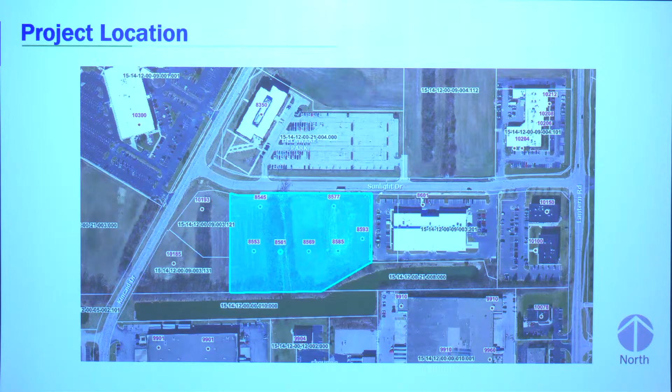The surrounding properties are also located in Delaware Park. The surrounding character is shown here with an office building to the west and to the north, and Paige's Music to the east.

The site plan shown here shows the proposed buildings and landscape. The project contains 12 car condominium buildings and the associated infrastructure, proposing 71 individual condo units in total.

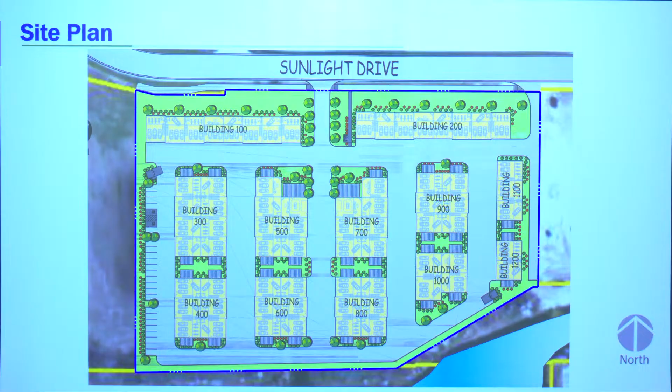The petitioner worked with staff by adding modulation to all buildings, updating materials, and reducing building massing by breaking up the internal buildings and adding green space with patios. They also worked to create an appealing landscape area added to the entrance point, making it the visible point off of Sunlight Drive, with more landscaping and patio area heading south.

Per the Delaware Park PUD architectural design standards, all mechanical units shall be located and screened to minimize visualization, which the petitioner has stated will be done with rooftop units screened by a parapet wall. The PUD design standards allow for materials including composite wood, steel, aluminum, metal, precast stone, precast concrete, porcelain ceramic tile, masonry, glass, and EIFS.

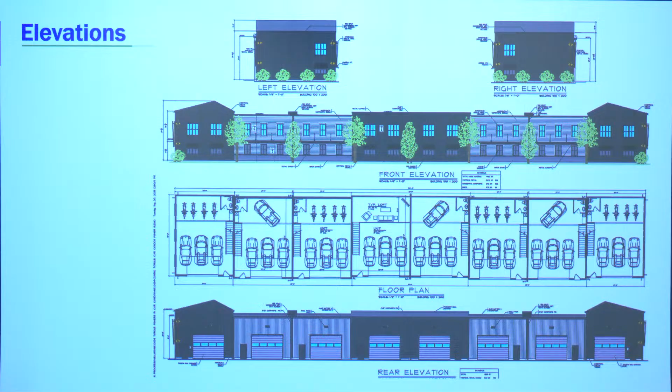These elevations are the elevations of the buildings fronting Sunlight Drive. These buildings will include vertical metal siding in 2 different colors, dark and light, horizontal composite siding, brick wainscoting, metal canopies and sunshades, and custom metal decorative brackets that are 12 feet tall.

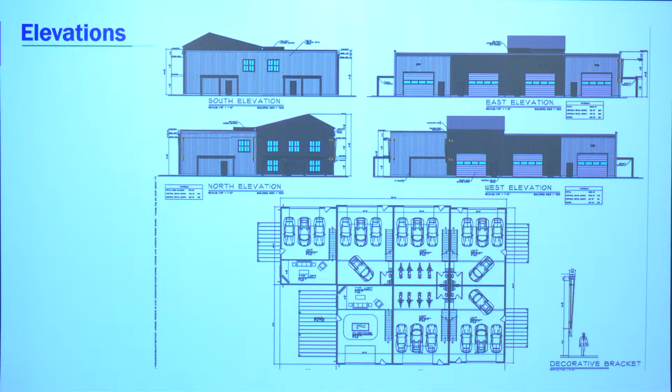These are the elevations of the internal buildings. The internal buildings consist of vertical metal siding in 2 different colors, metal pergolas, and custom metal decorative brackets. Here's another view of one of the other internal buildings.

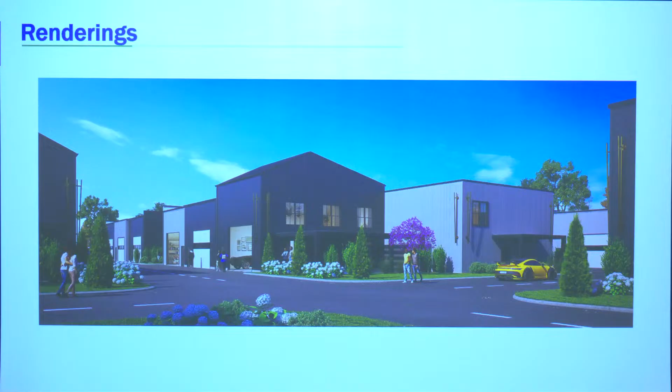These renderings show the building along Sunlight Drive to the left and a view of the internal buildings at the entrance point. Here's another image of the internal buildings from the entrance point, and these are some of the internal buildings and their patios.

Staff recommends approval of the proposed elevations as presented with the following condition: that all TAC comments are addressed during the ILP process. Staff is available for questions, and the petitioner is here to give a brief presentation as well.

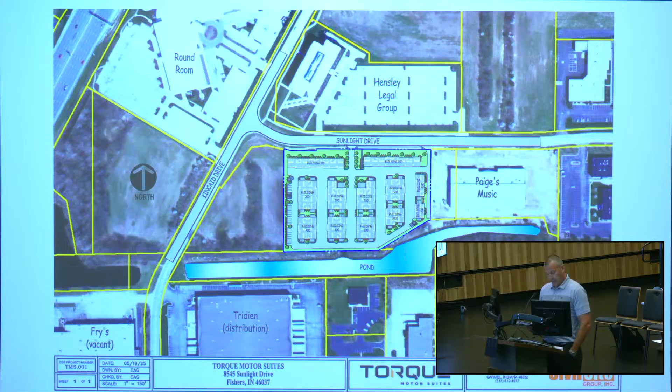The Torque Motor Suites project is located within Area C of the Delaware Park PUD, which permits C3 commercial and I1 industrial uses. All of the drainage and utility infrastructure within the Delaware Park development is master planned for both the existing and future development. So everything's right there for us, stormwater detention, utilities, everything's already in place.

The project was submitted back in November. We went to TAC and received relatively minor comments regarding the infrastructure. Since then, we've been working with staff to tweak the architecture, the site plan, and so on and so forth.

5 of the longer buildings were split up into smaller buildings with additional amenities, and building offsets were added as well. We originally had 7 buildings; that's now 12 buildings, with a reduction in the overall square footage as well.

Most of the end cap units here will have patios and pergolas, and there will be some common area clubhouse within some of these buildings as a common area amenity for the unit owners.

With that, I'd like to introduce Matt Blankenship with Nair Properties. They're the developer on this project. Matt's going to talk a little bit about the character of this project because I know it's a little bit unique and there may be some questions.

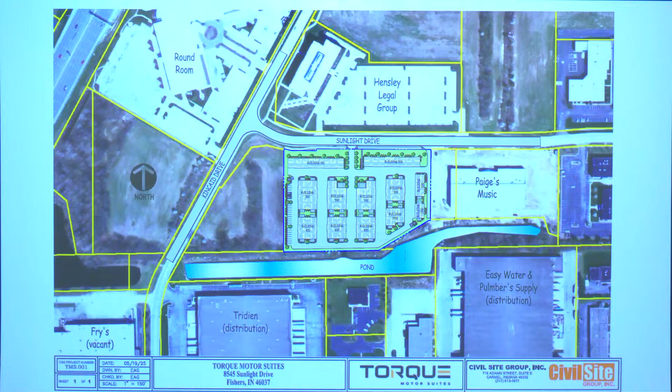Thank you, Eric. My name is Matt Blankenship with Nair Properties. We are the developer here of the Torque Motor Suites. First, I'd like to thank the staff and the board here for working with us as we've gone through the design. We are really excited by this.

So the concept of this is really for car enthusiasts, for those that have real interest to have a piece of property where they can own, customize, store vehicles, and really have a sense of community with other car enthusiasts. It's a demand that we've seen a lot in these different communities. This is the 4th one we currently have under development of these Torque developments in the Midwest and South, with more future to come.

So that was just a brief overview. Like I said, if you have any questions, let me know.

Thanks, Mr. Blankenship. Any questions for the petitioner from the board? Comments?

I definitely appreciate the work you all have done with us and staff over the last few months. Sitting here looking at those adjacent properties, the Kiddie Academy that was just approved, I still think there's a big miss on what it looks like, and on having all metal materials here. I know at one point we had recommended having more brick and masonry on the buildings. I'm really struggling with what specific feedback to give back that makes it not look like all metal panels. I look to the rest of our committee and members to share their feedback, but I'm still struggling with this project.

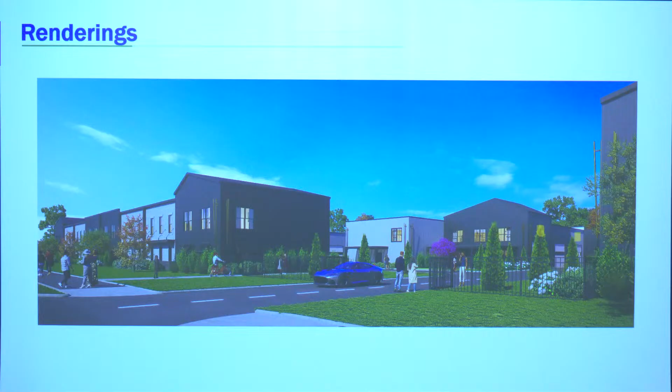If they're allowed to work on them, that means there's going to be oil and grease and whatever else. Do we have any of that being looked after in terms of the systems going into doing that? When we put restaurants in, there's a grease trap put in. When we design public works garages, which are again a pre-existing metal building, we've got to put in oil separating units and all that stuff. Is that part of this project if they're car enthusiasts? So I've got issues on a number of levels with this thing, and in its current condition I'm not supportive whatsoever. Thanks, Pete.

Sean, any comments yourself? And then I want to give the staff an opportunity to address the questions Pete raised. I'd echo both Megan and Pete's comments, specific to the architecture in general relative to the other buildings in the development.

I don't think all the buildings have to look the same, because we're pretty particular in that we don't require buildings to all look the same. I think that's something we've been consistent about. But it does feel like it's the outlier compared to what has been developed.

I can kind of understand the idea behind the pergolas, because it isn't just storage. The idea is that it's the man cave that's not in your house. So it's the guy that's got 2 or 3, $100,000 cars and has a place to store them, not at his house, and he's hanging out there with his buddies, smoking a cigar and drinking a bourbon.

But I also agree, is there anything preventing someone from working on a car there? And does that throw it into a different zoning classification of automotive maintenance versus automotive storage? So that would be my concerns as well. Thanks, Sean. Any comments, Drew, on your end? Okay, Ross. Go ahead, Megan.

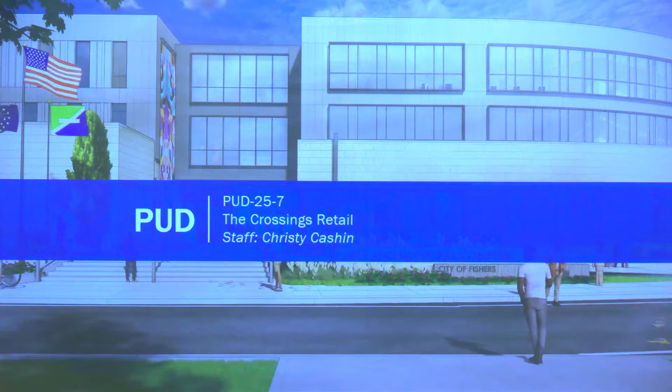Thank you. Our next agenda item is the Crossings Retail, case number PUD-25-7. It's a request to approve the site plan and architecture for 2 multi-tenant retail restaurant buildings located at 9086 Maynard Lane. Christy is here once again for the staff to present. Good evening again, Christy Cashin, Senior Planner with the city's planning department. The project before you tonight are 2 multi-tenant retail restaurant buildings located at 9086 Maynard Lane.

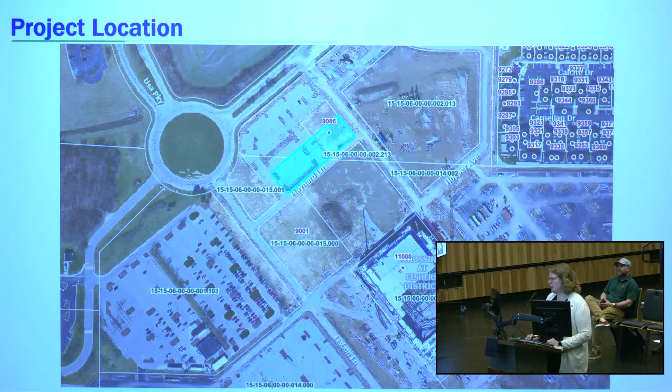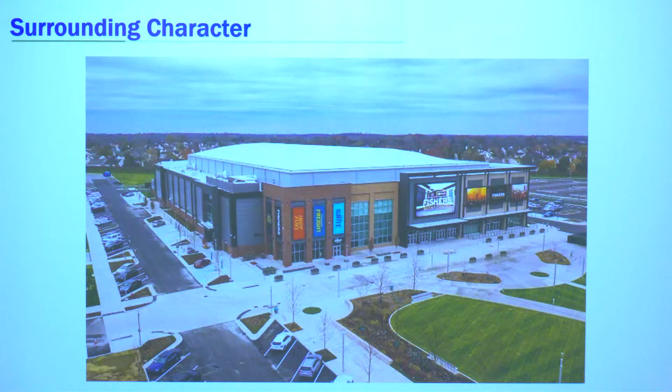The property is generally located on the eastern quadrant of the USA Parkway and USA Drive roundabout. The property is located in the Yard Phase 2 PUD, ordinance number 091922F. The Fishers Event Center shown here is the surrounding character for this area. The event center is also located in the Yard Phase 2 PUD.

This project was first presented at the State of the City event in February of 2025. At that time, the architecture proposed is shown on the left image. When writing the staff report, staff had new architecture shown in the middle image for May. All elevations and renderings in the staff report reflected that May image.

However, since the staff report was written, the developer has worked with staff to add masonry and an actual balcony on the second floor of each building, shown on the right-hand side here. The site plan and renderings I'm about to present reflect the newest updates to the two buildings.

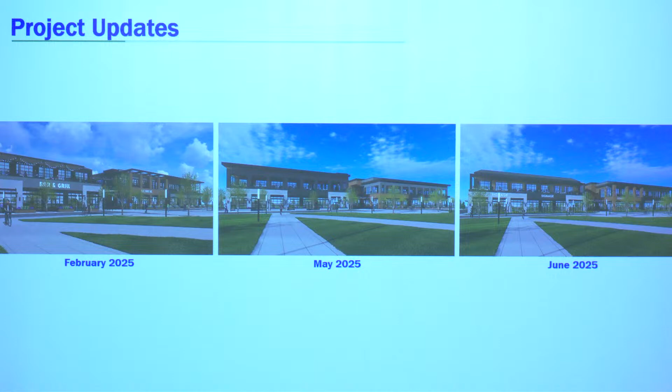The site plan shown here shows the proposed buildings, parking lot, sidewalk infrastructure, the dumpster bay location, and associated infrastructure. The development will contain an 8,500 square foot building and a 10,000 square foot building. The petitioner worked with staff to move the dumpster location away from USA Parkway while keeping it out of sight from the plaza at the event center.

They widened the walkway across Maynard Lane, created sidewalks without disruption, including landscape buffering along Maynard Lane, and updated the architecture to add modulation, balconies, and additional brick materials. Please note that on Building 1, the building on the left-hand side, the angled wall you see is due to a sanitary easement on the property.

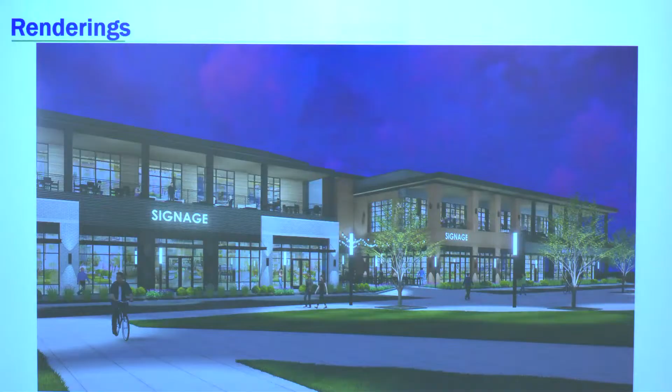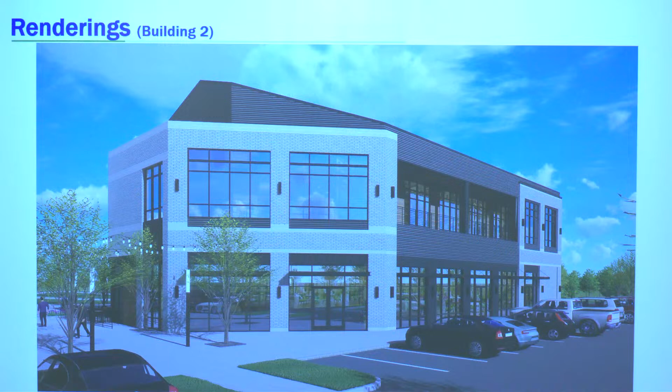The following renderings show the architecture and site layout. These are all views from the plaza. This is Building 1 with the lighter brick color. This perspective shows the angled wall on Building 1 and the pedestrian pathway to the event center plaza on the left. This side of the building faces the parking lot and USA Parkway.

This is Building 2 with the red brick. This corner of Building 2 will be visible from Stockdale Street, the main entrance to the event center. This is the view of Building 2 from the parking lot. This view faces USA Parkway. And here's a perspective of Building 2 showing the view while entering the event center property from Stockdale Street.

Staff recommends approval of the proposed architecture and site plan as presented in tonight's presentation, as long as the following condition applies: that all TAC comments are addressed during the ILP process. Staff is available for questions, and the petitioner is here to give a brief presentation.

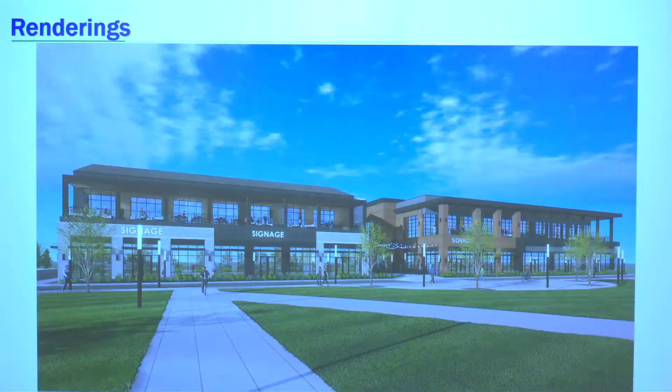This space would allow tenants to get from their space to that exterior corridor to either side of the building. One being that public vertical circulation stair and elevator. The other being more of an egress stair. Building 2 egress stairs on the back right. Building 1 egress stairs on the back left. I'm gonna stop talking here in just a second.

Other thing about this project, there are 4 fronts to both buildings, right? And this happens quite a bit in more urban settings and big developments. The trick is always, where does the stuff you don't want to see go? Where are all the utilities? Building 1 is a little easier because this isn't a highly public street. We've got kind of a water riser utility room adjacent to that egress stair. And then the plan is for any exterior wall-mounted electrical equipment to sort of land in that corner.

The same is true on the opposite side of building 2. So egress stair back in this corner, utilities, incoming services, and then electrical equipment down on it.

I know we've talked with staff about that corner is important because as folks are coming in on Stockdale to the event center, that's a pretty public part of the project. That view right there, we've talked about the possibility of, is there murals or something on the building to sort of help activate that corner? I will say what we've got up on the screen here is, I think, better than maybe what we had a few days ago. So we've already started to add the brick, add the glass. I think there's gonna be some kind of equipment on the corner, but I think there's an opportunity for art or signage on this corner that helps lead people into the event center district.

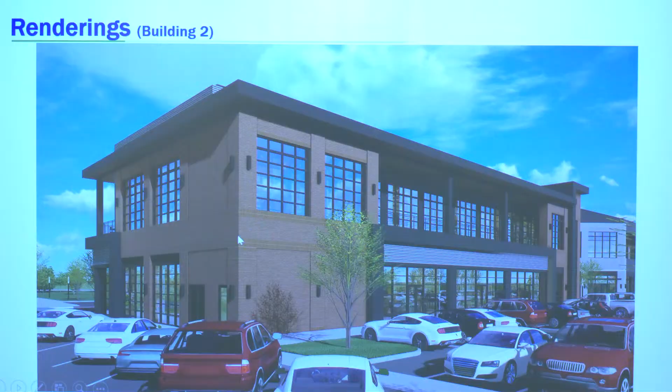Thank you. Thanks, Nick. I would say I like your description. I wouldn't mind them being twins as long as they're not identical. There are fraternal twins, which may be close to a sibling or a first cousin. I'll open it up to fellow board members with questions for the petitioner or the staff.

I just had a couple of clarifying questions. So the parking plan for the north on the backside, that integrates in with the existing parking lot that's there? Is that what it is?

Okay, and can you talk a little bit more about the connection to the event center? Just this space here. Yes. I'm speaking a little bit for civil, but I think I can do a good job.

Most of Maynard stays exactly how it is. We are raising the crosswalk between our parcel and the park space. We don't want people stepping down off a curb and back up. This is meant to be a path from parking between the buildings to the buildings, and across Maynard to the park and to the event center.

I know we had originally showed a much narrower sidewalk in this zone. We have since grown it to at least 15. I think we're still looking at this space. The whole point of this space is for it to be activated and for the first floor tenants to be able to spill out into that space with outdoor seating.

The other comment is this building, at the northeast corner where you talked about your utilities coming in, suggestion, maybe, because that's the main road towards the event center, it would maybe cost you a parking space or two, but to jog that sidewalk out a little bit, add some sort of screen wall there so that people aren't walking right in front of the electric meter, gas meter, things like that, just to help screen it a little bit from view and keep it away from people being up against it.

Potential additional space for some public art or something there. We're going to want to screen it too. Yeah, we don't... other than that, no issues.

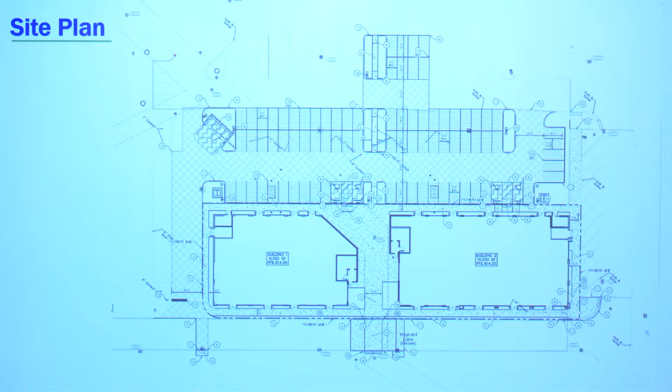I like how effectively the front door of both buildings is facing each other, facing that kind of plaza space. I think that is really well done. And the cousins, I'd say maybe they're distant cousins, but I don't have a problem with that either.

So overall, great job. The comments I have, first of all, Sean, I agree with you, they need to be distant cousins. I'm very happy with the buildings looking different. I don't need them to be twins, fraternal or paternal. I just think that's caused a problem. I like the difference in the architecture. I think you guys did a really good job bringing it back into the overall feel. Overall, just a fantastic project.

The other thing I'll tell you, and I've adopted this too, having had a conversation with you guys about it before, not you particularly but the BW folks, is that maybe we should stamp drawings 'for illustrative purposes only.' You asked me to provide this for a city meeting, and I get caught with that all the time when I give mayors renderings of things, and then suddenly when we get there, it's not close. I say, well, I told you that budget was different than this budget. So that was my only point.

I feel for you having to go through that, because in my opinion, being in the same line of work, you guys do prettier stuff than we do. I'm doing jails and police stations, but still I don't like getting caught in that mess. So I'm very much in favor. I'm looking forward to the dynamic that's going to go in there and continue to activate that Fishers Event Center space. So exciting stuff.

Thanks, Pete. I'll make a motion to approve. We have a motion by Pete. I'll second, seconded by Megan. Roll call, please. Ms. Baumgartner? Yes. Mr. Peterson? Yes. Mr. Curran? Yes. Mr. Bender? Yes. Mr. Stevenson? Yes. The motion does carry. Thank you, good job. Look forward to it.

Our next agenda item is Goodman Campbell, case number PUD-25-8, a request to approve architecture for an approximately 11,900 square foot medical office building located in the MedTech PUD. We have Grace Wiley with staff to present. Grace Wiley, planner in the city's Planning and Zoning Department. The project before you tonight is a proposed commercial development located at 13680 Jack Walker Lane. The property is generally located at the northwest corner of Jack Walker Lane and 136th Street. It is in the MedTech PUD, ordinance number 052118J. The surrounding character is undeveloped and will be surrounded by other medical office buildings of similar character in the future. Elevations and the site plan for Priority Physicians, the lot to the east, were approved by this committee last month.

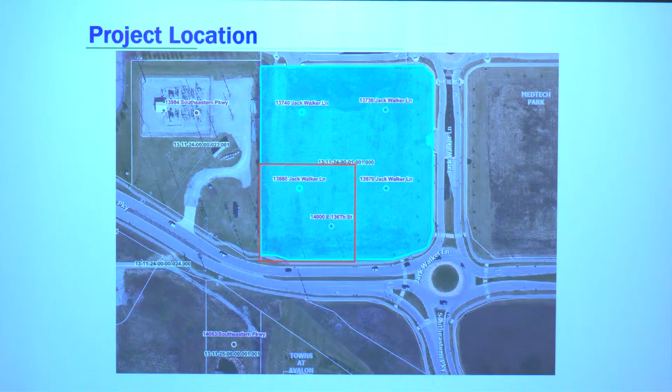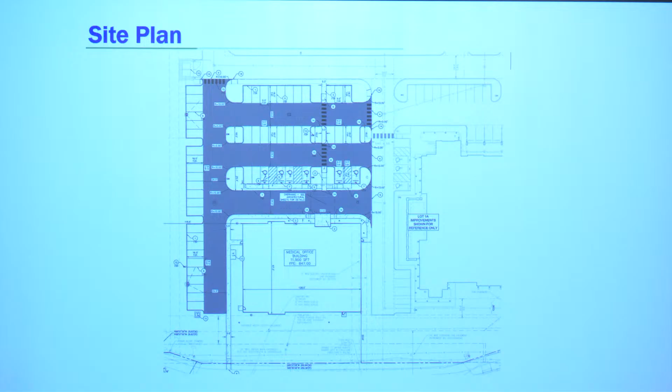The site plan for this project is shown here. Lot 1A, shown to the east, is the one you approved last month. The proposed building is approximately 11,900 square feet with 54 proposed parking spots. Shown here are the proposed elevations. Materials include masonry veneer, channel edge metal, and aluminum panel. This PUD defers to the UDO for architectural standards, which were included in the staff report. The roofline standards laid out in the UDO are not met by this design, but staff believes the spirit of the ordinance is being met.

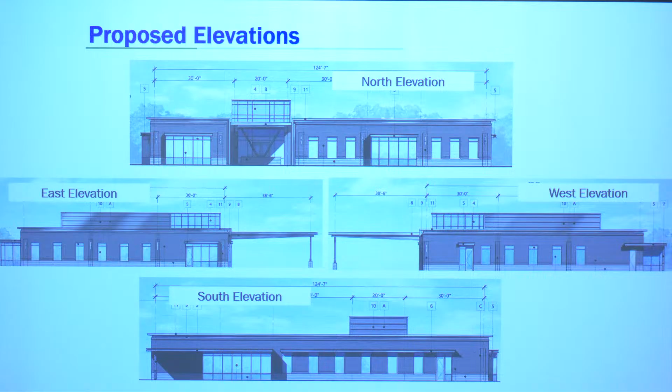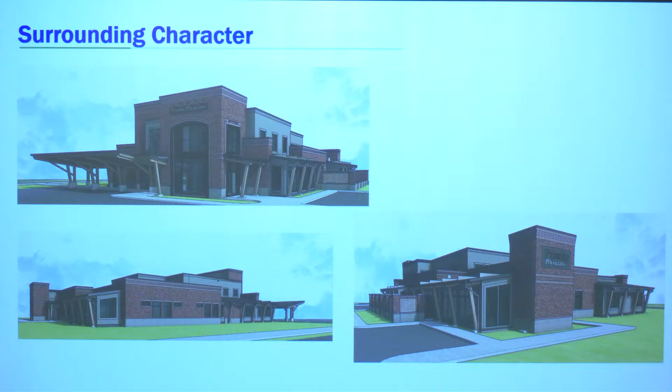Here are renderings of the proposed building, and shown here are the Priority Physicians elevations that were approved by this committee last month. Staff recommends approval of the proposed elevations as presented, with the condition that all TAC comments shall be addressed. Staff is available for questions. Petitioner Bill Betts has chosen not to present but is here and available for questions.

We won't hold it against you, Bill. Thanks, Grace. Questions for staff?

On the brick color, I couldn't tell if it's more tan than gray. It's a gray, like a medium gray. It's a little bit different between the elevations and the renderings, but nothing's been selected as a final material yet. Okay, I looked at the building adjacent to it, which was interesting, but you're in a medical office plaza, and this looks like a medical office building to me. So I appreciate what you've done with the masonry, etc. You're in a great area for a really good business that I think belongs there.

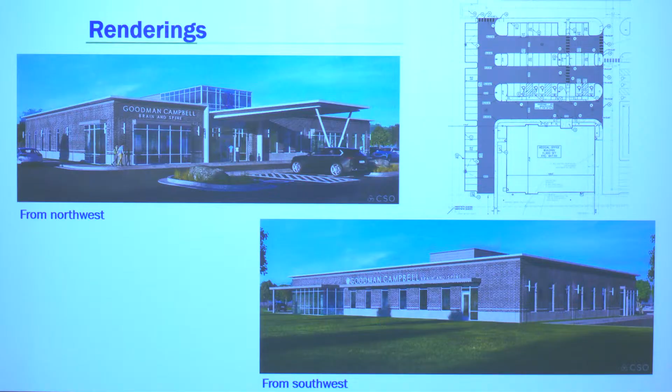Ross, we don't have any River Place PUD committee agenda items. Any staff communications? The only one is that we may have a PUD committee in July, on July 2nd. That's already on your schedule, so I just wanted to put that on your radar, but that's to be determined for that meeting. I presume we'll have a plan commission on that same day. Yes, we will. Thank you. Well, if there's no other matters, we are considered adjourned. Good seeing everyone.